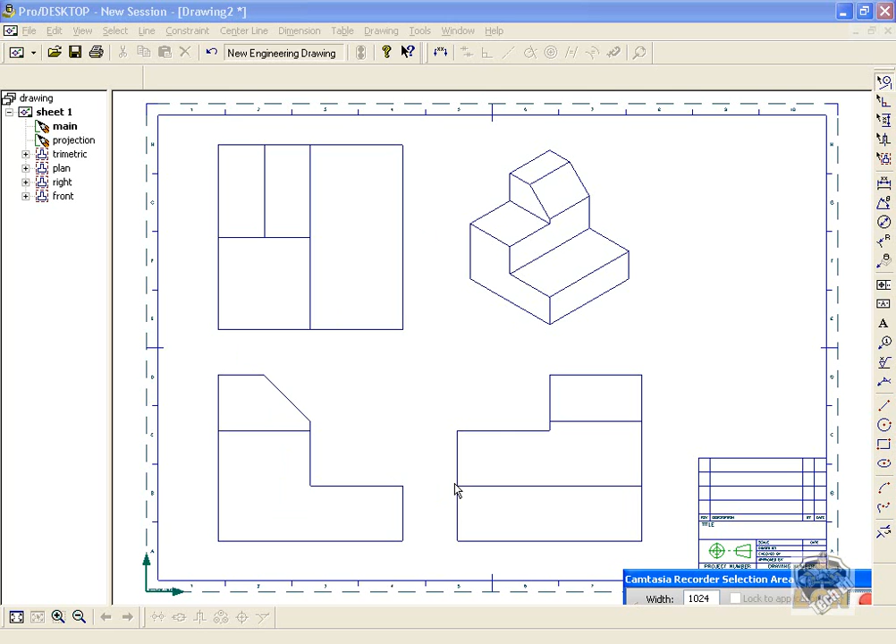If you're up for a challenge, you can go off of one of the previous drawings we've done for block 1 and then slant the face, or you can follow the steps I'm going to go over right now. I'm going to go to design mode, and although I have it already built, I am going to start from scratch.

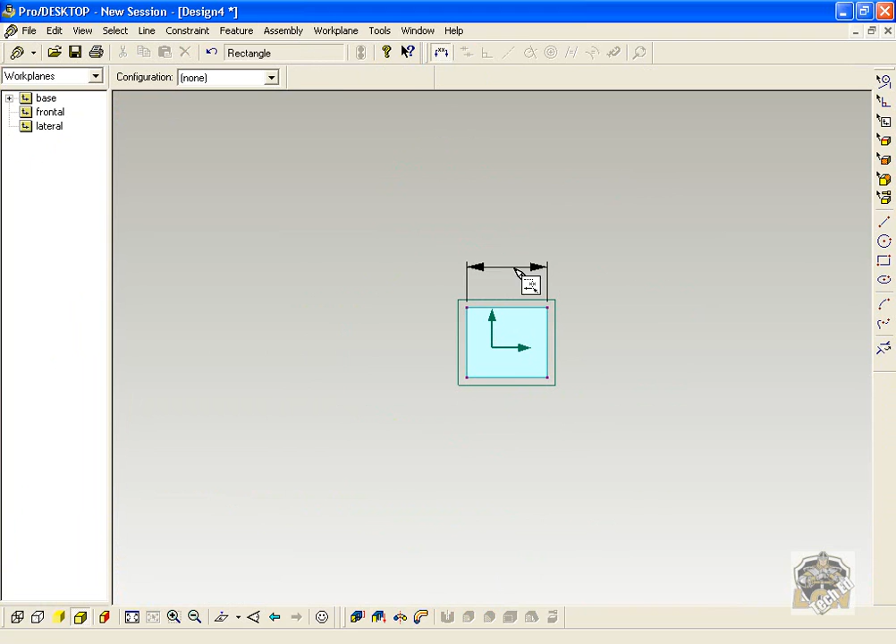I'm going to hit new design, shift W. I'll draw a small square in the middle, get the dimension tool, click and drag a line out, and change that to 1.25. Then grab the dimension tool again and do the other side of the square, also 1.25 inches.

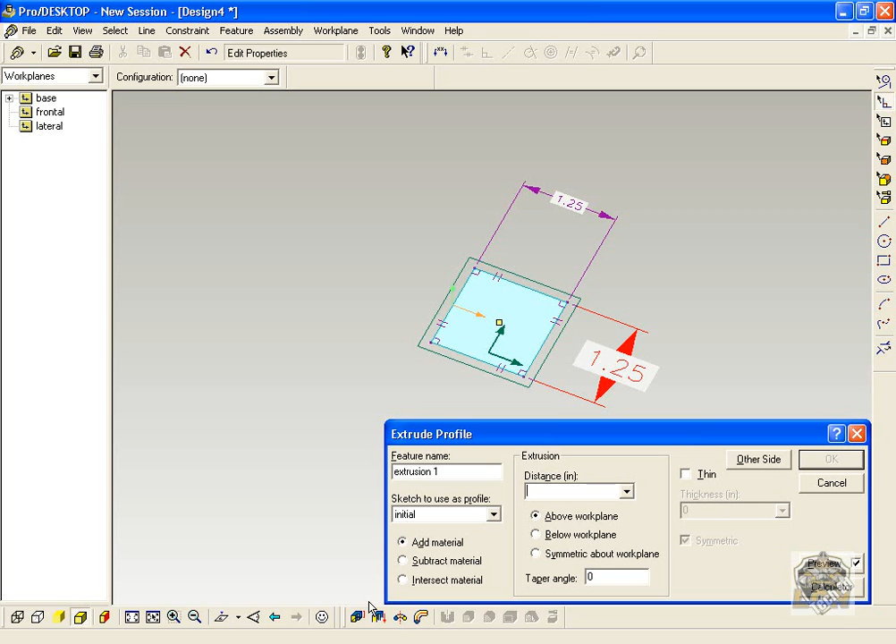I'm going to zoom in, tilt it using the mouse roller, and click extrude at the bottom. The height of one layer is 0.375 inches.

Hit OK. Then I put our second tier face on, so we select this top face with the Faces tool, hotkey F, right click, and make sure a new sketch goes on top of it. The name doesn't matter.

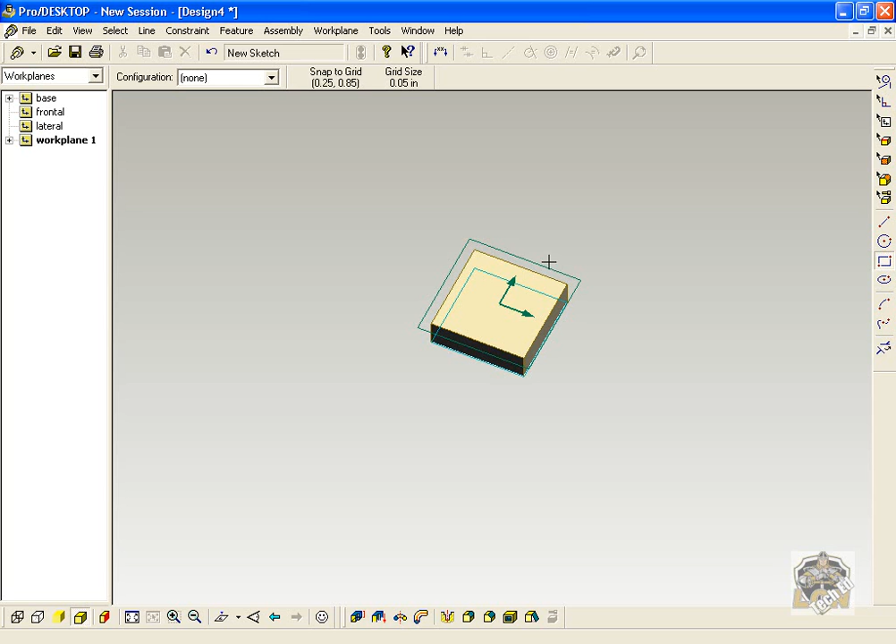I'm going to connect from the corner to the midpoint snap, and then extrude that the same distance, the height of a Lego, 0.375. Enter.

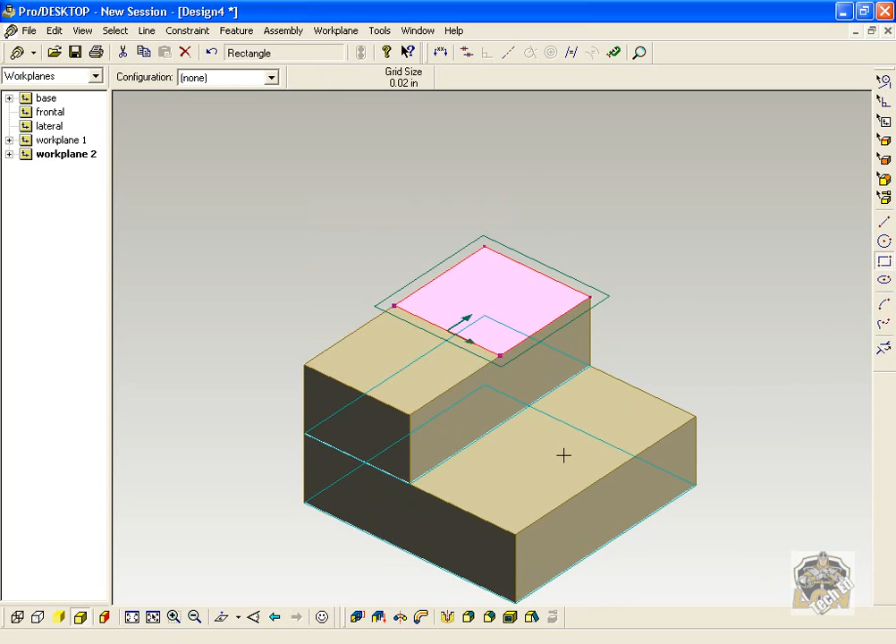Faces tool, new face, new sketch, hit OK, zoom in a little bit, choose the square tool. This would be the square base of an angled piece of Lego, same as a 2x2, and we're going to extrude that up the same distance, 0.375, as a Lego piece.

Now this gets into something new, so I'm going to pick a new face on the side of my block here and lay down a sketch. Right click, new sketch, OK, shift W, zoom in on it.

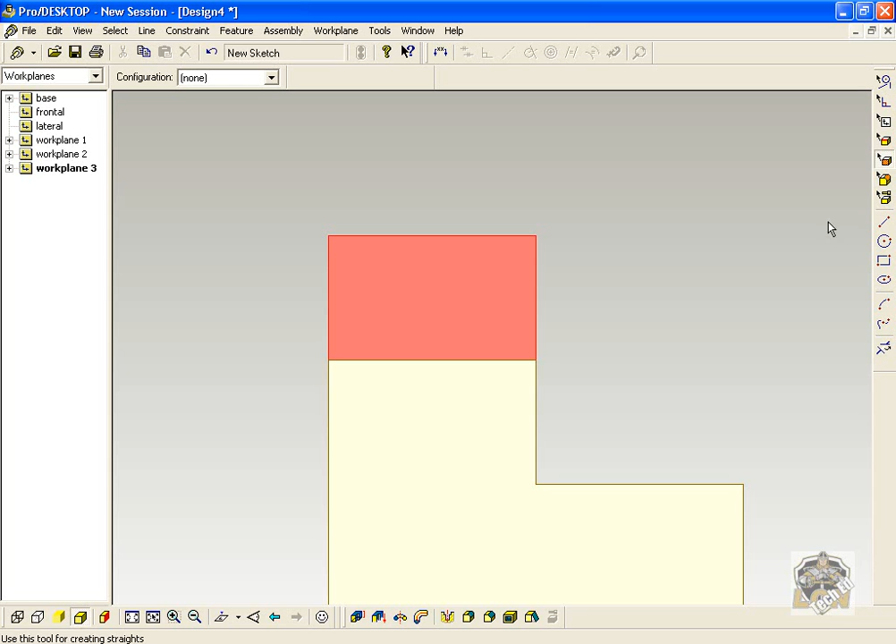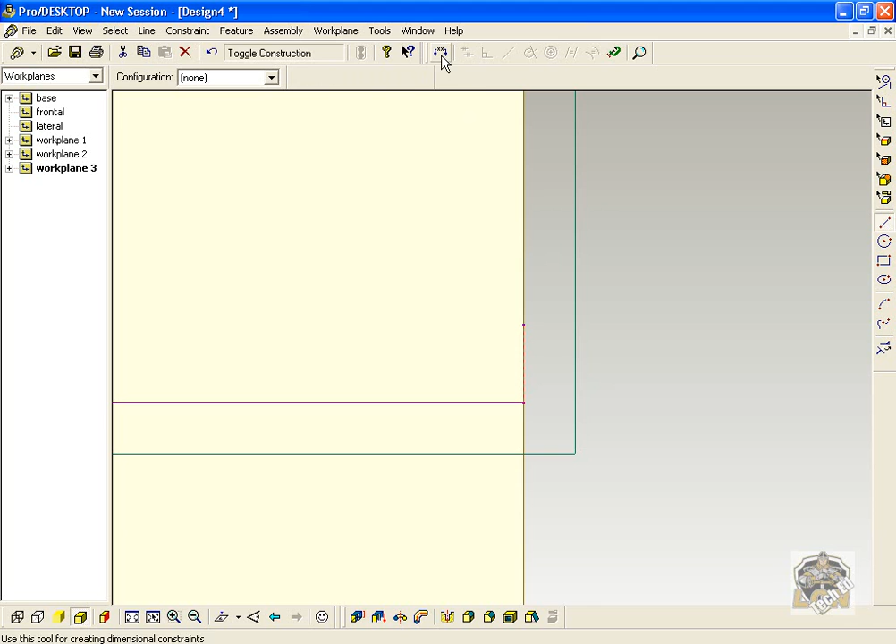Now I'm going to tell you the measurements of an angled Lego block. The first thing we're going to do is it has a little lip on the bottom, so I'm going to draw a line there, and I'll hit Control G and zoom in on it. You can see it's a dotted line — that's a construction line or guide line, if you want. It's not part of the drawing, it's for reference only, because we're not going to cut this part out.

And that goes up about a 16th. You can actually enter 1 divided by 16 into the menu, hit OK, and it'll calculate it to a decimal for you.

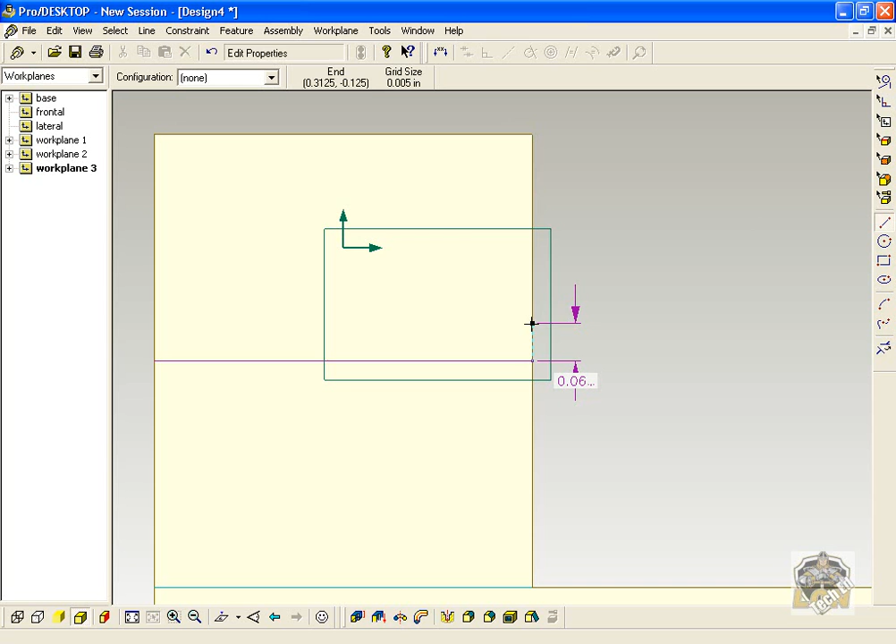Now from here we're going to draw the actual profile that we're going to cut out. I'm going to start from this end, go to the midpoint, and then complete that triangle, snap for that corner, and then snap down to this again.

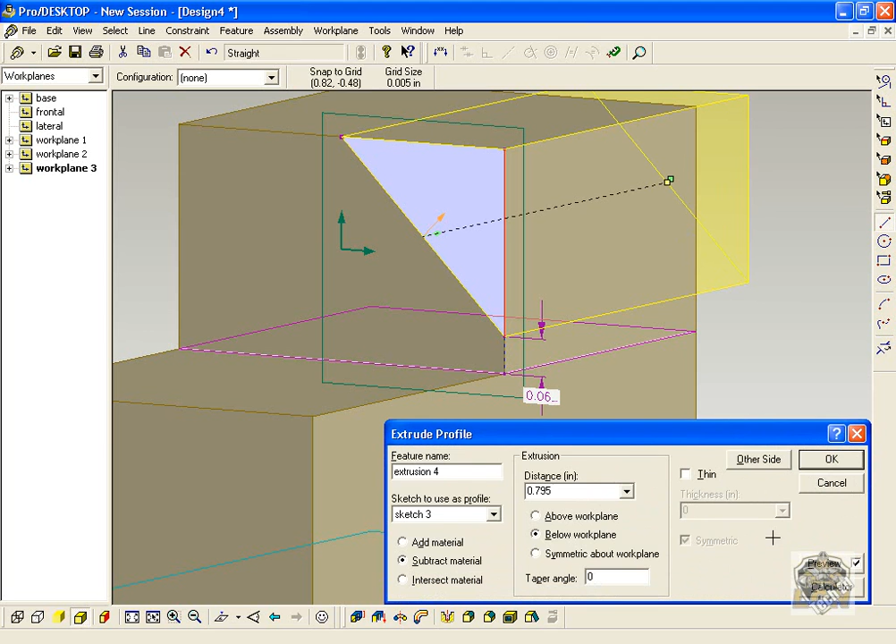So now I can tilt this, go to extrude, and I can drag it back, and then I can subtract material.

Now I've had some questions on how do I put Lego dots on these things. This is not required, but some students are asking about it, so I'll quickly do it. Let's say you want to do Lego dots: select a new face, do a new sketch, hit OK.

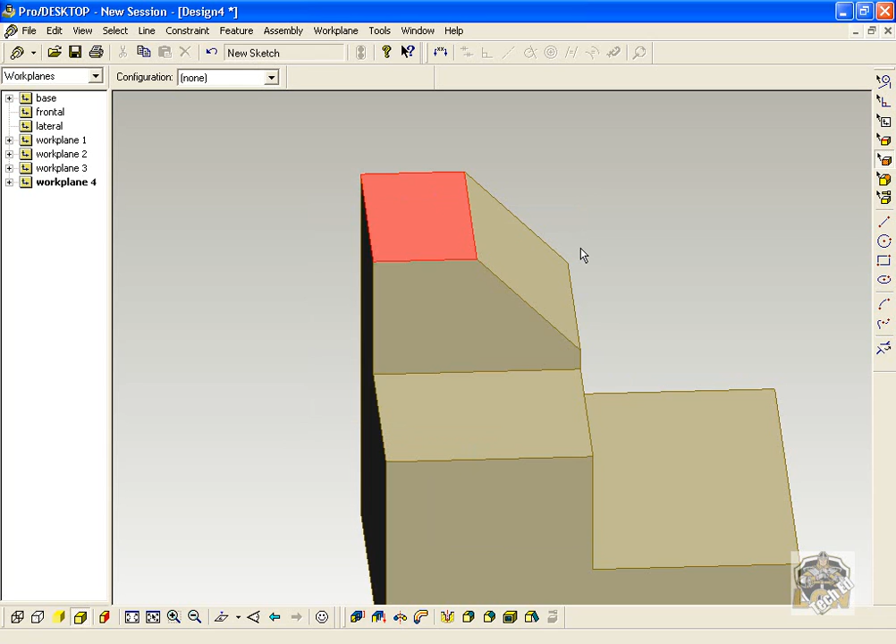I'm going to hit Shift W. All you need to get to is the center of a square, so I can bisect this area, Control G, bisect this next area, Control G. Those need to be dotted lines.

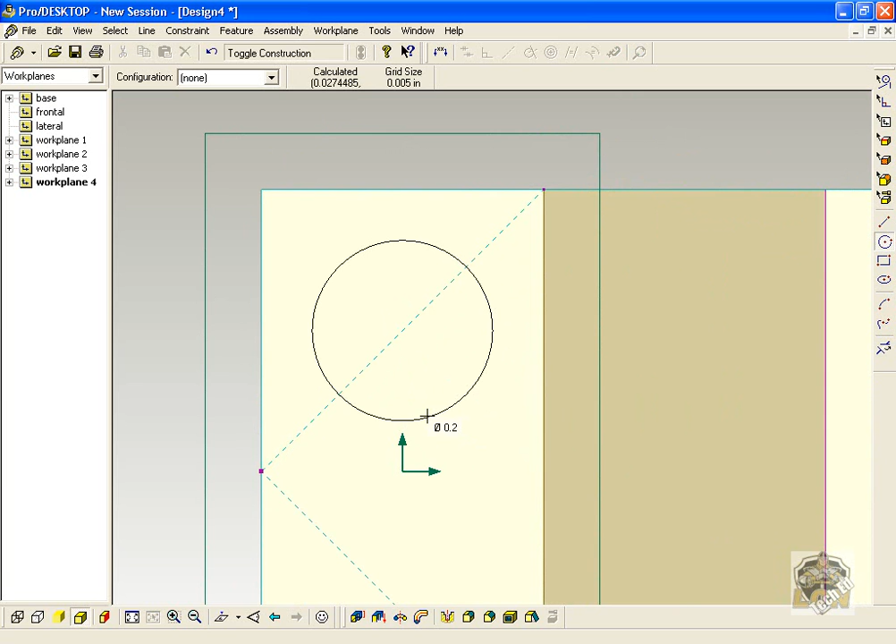I've already done the work, so I know a diameter of a Lego dot is 5 millimeters. I'm not sure what that transfers into inches off the top of my head — you guys can look that up. So I'm going to leave it at 0.2 because it looks roughly right to me, and we can convert it later.

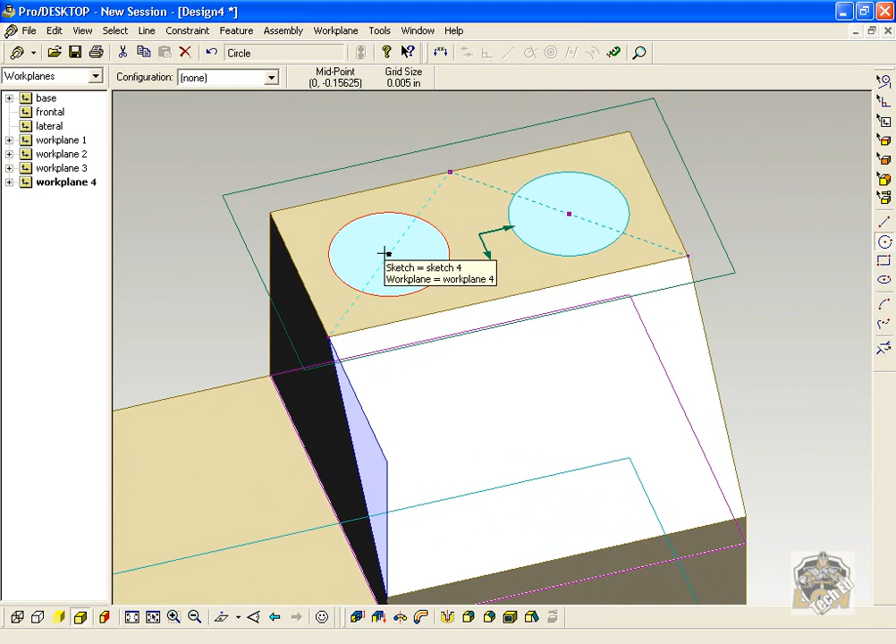But for the sake of the technique, here's how you do it. I've dissected 2 squares, so imagine this rectangle is 2 equal squares. I've dissected those two to get the midpoint, since the circles are centered, and then after that, you're going to lift it up 1/16 of an inch. There you have a Lego dot.

So I'm asking you to complete the slant, and then if you want to throw Lego dots on your whole piece, go for it. Enjoy.